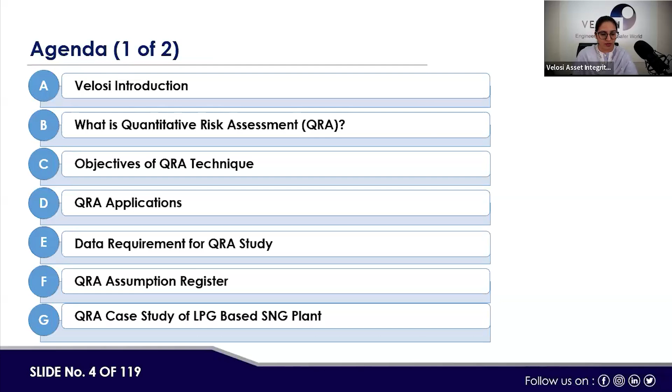Before we begin, let's have a safety moment. Although most of us are in the comfort zone of our homes, we should be aware of emergency exits, keep a safe distance, and generally take care of ourselves and those who are around us.

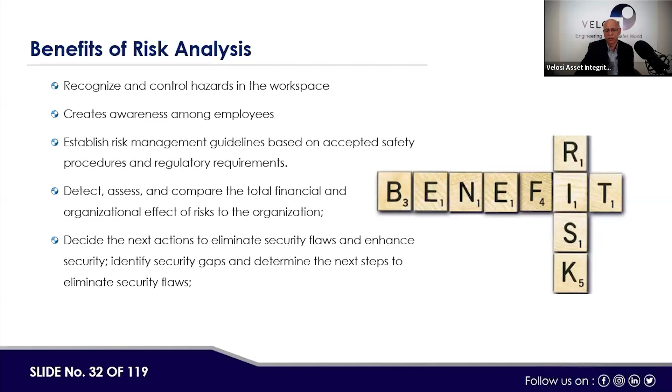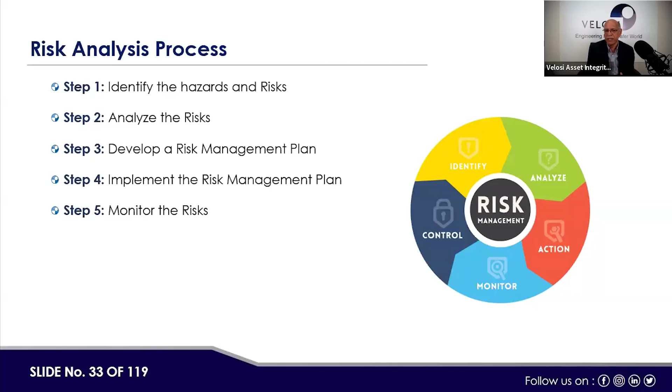So as we have a fair idea about the risk analysis process, what are the general steps when we make a risk analysis process? First of all, we need to identify the hazard, then do the risk assessment, analyze the risks, develop a risk management plan, implement the risk management plan, then monitor the risk management plan that has been applied, like all the mitigative or preventive measures we have identified, whether those are effective and minimizing hazards in the workplace.

As a normal definition, how do we do risk assessment? First of all, system definition or system boundary, what kind or where we want to do the risk assessment. For example, if we are crossing the road, there is also some sort of risk assessment. If we are making any investment in a bank, insurance company, or our own business, we assess what is the risk we will be able to make money.

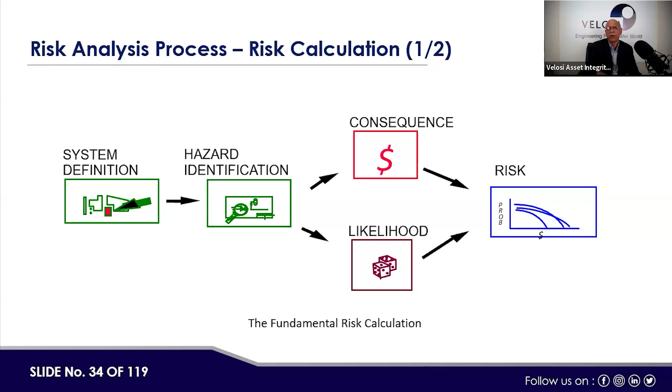On the process side, if we are making a hydrocarbon facility, what is the probability ignition can take place and burn the entire facility? So there is also this risk concept. First of all, we define where we are doing the risk assessment, then hazard identification is done, then consequences in terms of dollars, asset loss, or fatality are calculated. Then likelihood is assessed, and risk is basically estimated as a multiple of likelihood and consequences.

Let's take one example of how we apply the risk assessment concept in our day-to-day life. For example, an insurance company trying to insure 1,000 cars over 1 year, charging only 1,500 USD per car as an annual premium, whereas let's assume the total cost of each car is 15,000 USD.

So they're taking only 10% of the cost as a premium. This means if one car faces an accident, the insurance company will end up paying the full 15,000. Let's see how much money the insurance company is able to collect if they're insuring 1,000 cars. So 1,000 into 1,500 is about 1.5 million.

Let's say 50 cars out of 1,000 are meeting accidents and are fully damaged. So the probability of a car being hit by accident is 50 divided by 1,000, which is 0.05 per year occurrence. The price of each car is USD 15,000. The total risk for the company is 50 by 15,000, which is 750,000. The margin between the money being collected and the potential payout to the customer is 750,000 versus 1.5 million. So almost 100% margin they got.

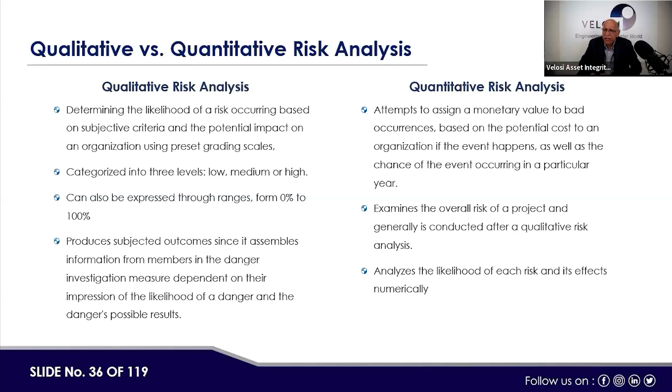So in normal terms, qualitative is more opinionated, quantitative is mostly calculation based. There's also a third term called semi-quantitative, where some is opinionated and some is based on calculations. From a results point of view, quantitative could be considered more accurate, and qualitative more opinion based, with more estimation margin. So semi-quantitative is in between accurate and semi-accurate.

Now, when we talk about qualitative risk assessment techniques, there are various qualitative risk assessment techniques. Even in RBI, risk-based inspection program, we talk about three kinds: qualitative RBI, semi-quantitative RBI, and quantitative RBI. This is also driven by the risk assessment definition—qualitative risk assessment, semi-quantitative risk assessment, and quantitative risk assessment.

There are various techniques used to carry out qualitative risk assessment in a process. These include hazard assessment, or HAZID assessment, or ENVID assessment. There are three workshops done for assessment of risk hazards: the one related to safety is termed HAZID, the one related to environment is called ENVID, and the one related to health is called OHID. So three workshops are done: occupational health related hazards, environmental related hazards, and safety related hazards. Once the hazard analysis is done, we know which are minor hazards, major hazards, or major accidental hazards, MAH.

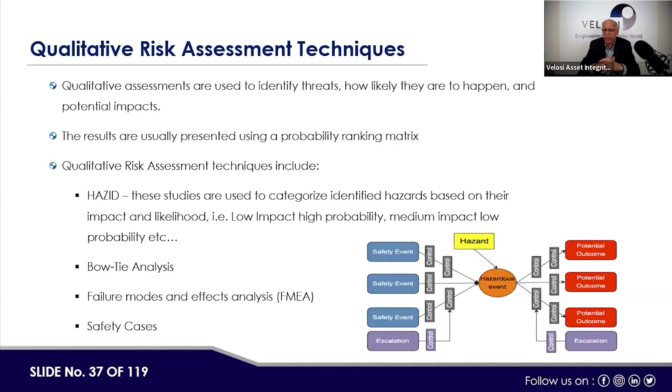Those can be identified. Then quantitative risk assessment is more like, as I said earlier, quantitative calculation based, right? Where probabilities calculations are involved, consequence side calculations are involved, and multiple mitigation layers are also involved in the calculations. And in this way, we try to demonstrate the risk aspects or the consequence aspects on the system.

For example, if we take quantitative risk assessment, normally we use two softwares. I'm not favoring DNV, but since we are mostly using DNV, that's why I'm referring to them. One is PHAST, and the second one is SAFETI. PHAST is basically for the dispersion modeling, which is mostly consequences, and SAFETI is basically risk, consequence and probability, and then risk is calculated. So by combination of these two tools, where SAFETI is a combination of PHAST and the risk side, we are able to see the contours of the consequences and contours of the risk as well.

So in general terms, the data which is populated is based on certain calculations, certain input data, and accordingly, we are able to estimate risk up to a particular accuracy level. We cannot say the QRA risk assessment is very accurate. No, it's still a judgment, with many ifs, and there are many assumptions. For example, who can say whether hole size would be 1/4 inch, 1 inch, or there would be a rupture? Which part of the pipe would have a leakage?

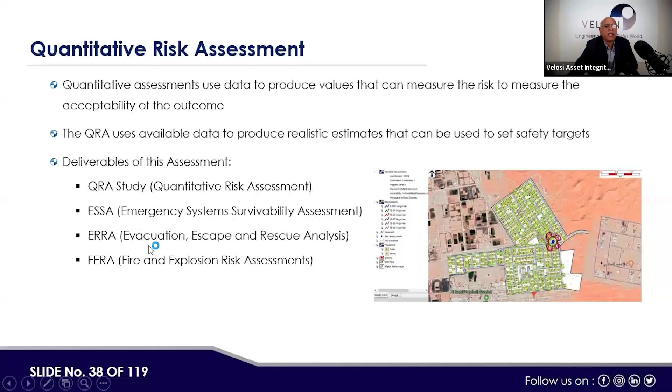So two studies are very much relevant to quantitative risk assessment. One is QRA, and another one is FERA, the first one and the last one in my presentation. Here, QRA is quantitative risk assessment, and FERA is fire and explosion risk assessment. Both are more or less the same. FERA is more focused on the assets, whereas QRA is more focused on the people. Then there is ESSA, emergency system survivability assessment, and ERRA, evacuation, escape, and rescue analysis.

So if we ask ourselves, what can you deduce from the different deliverables of qualitative and quantitative assessment, what we can produce, what we can achieve? Both types of risk assessments are necessary for risk studies and they do not go against each other. Qualitative, semi-quantitative, and quantitative, all three approaches complement each other. One is more on the quality, the judgmental side. The other is judgmental plus calculations, and quantitative is more calculation based.

Qualitative assessment forms the foundation of quantitative studies that need to be performed. Both types of risk assessment are equally important. For example, bow tie analysis is a qualitative study. It provides input for many QRA studies.

Now, if we go a little bit more into the quantitative risk assessment side, what is QRA? Now you will see some repetition; we are debating the same points again and again. But this webinar is focused on newcomers. I know there could be some people who already know the QRA process, and for them it could be a little boring or repetitive. However, for newcomers, I have to go through the basics, so people can understand and use it further.

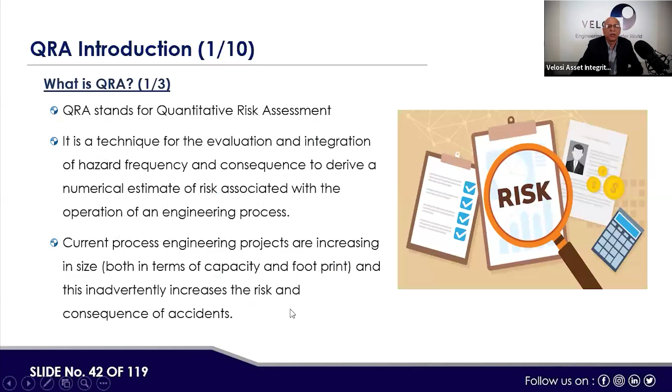It could also be applied to non-engineering, but we are saying engineering process. Current process engineering projects are increasing in size, both in terms of capacity and footprint, and this inadvertently increases the risk and consequences of accidents.

Now, the types of hazards: there could be process hazards, environmental hazards, and occupational hazards. With occupational safety hazards, normally we call it HSE. H is health, S is safety, and E is environment. Process hazard goes with S, occupational hazard goes with H, and E goes with environmental hazards. So which hazards are considered for QRA? Normally, process hazards.

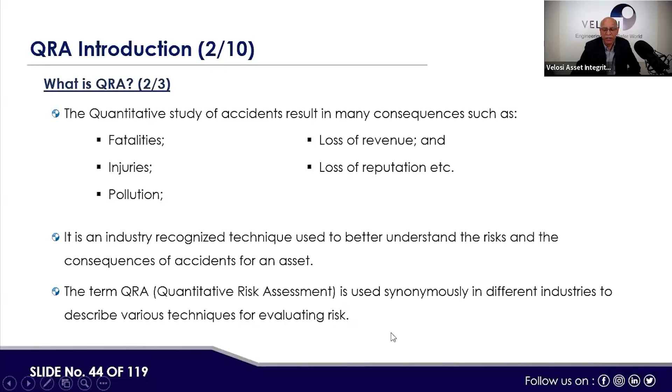Now, the quantitative study of accidents results in many consequences such as fatalities, injuries, pollution, loss of revenue, and loss of reputation. But here, in the QRA, it would mainly be focusing on the PLL or the safety hazards generally. It is an industry recognized technique used to better understand the risk and the consequences of accidents for an asset. The term QRA, quantitative risk assessment, is used synonymously in different industries to describe various techniques for evaluating risk.

Now, what is QRA? Again, the technique discussion is ongoing. High risk or major accidental hazards have been identified for operation. QRA shall be required to demonstrate tolerability and ALARP in support of a project or a facility. There is potentially high risk exposure to workers or the public at the project site.

What we are trying to achieve in the QRA is: what are the hazards, what is the quantity of those hazards, quantification wise, how big, how small, how much effect this hazard would have on the people, on the asset, in terms of toxicity impacts, or in terms of fire and explosion impacts. And then accordingly, what kind of preventive measures are there, what kind of mitigating measures we can add and utilize in minimizing those hazards for the owner and for the operator in the area.

Application. Identify process hazards associated with the facility. As we've been discussing, it is a valuable tool for determining the risk of the use, handling, transport, and storage of dangerous substances. To quantify the risk associated with the facility, for example, risk contours, individual risk per annum (IRPA), potential loss of life (PLL) and FN plots for the various kinds of risk. Identify appropriate risk reduction options. Demonstrate the risks are being managed to a level as low as reasonably practicable.

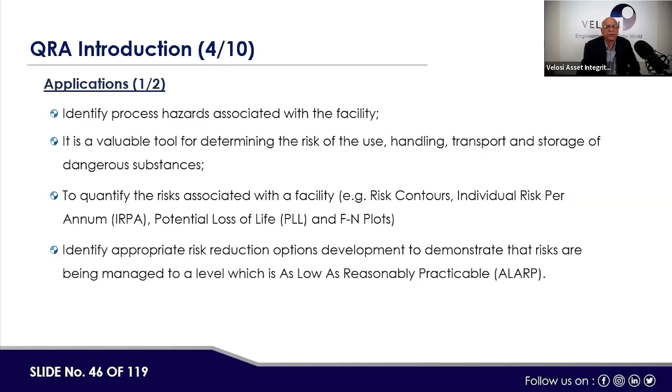Next, if there is a certain risk associated, how can that risk be minimized? To minimize the risk, we may have to increase the costs. We may have to add more mitigative measures. We may have to make a safer or inherently safe design of the process equipment. So it would also have a certain cost. So there is a cost benefit analysis of how much risk we take and how much cost we spend. Based on the cost benefit analysis, the system or operation is kept inside the ALARP region.

Some other QRA applications, such as fatality risk assessment, comprehensive QRA, risk to life, safety function, evacuation, escape and rescue analysis, emergency system survivability assessment (ESSA), and fire and explosion risk assessment, are also part of the QRA or risk assessment exercise.

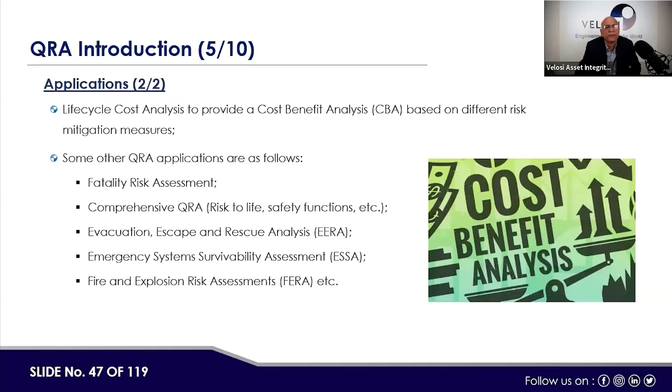Benefits we also covered earlier, but again, to help you carry forward, the benefits of QRA: help to reduce risk by supporting risk-based decision-making, comparing options during the design phase or for modification during operations, supporting the demonstration that risk levels are reduced as low as reasonably practicable, defining requirements for land use planning, and defining requirements for emergency response planning.

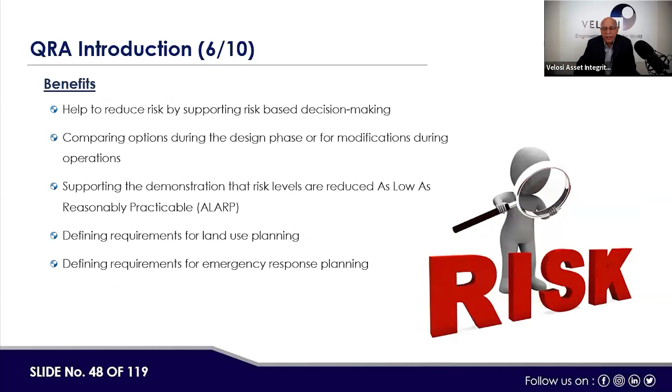Then there are also limitations. The QRA process implies a level of accuracy that does not exist. It's not so accurate. There are things like how we estimate the volume of the fluid, how we estimate the parts of that particular inventory, how we make the inventory isolatable sections, and similarly the number of holes, the location of the hole, direction, wind effects, and so on. So there are still other factors which create limitations for the QRA process. It can divert attention from precautionary or preventive measures.

Lack of reliable data in specific areas may also cause trouble and may misdirect us. It is often dominated by hardware issues and rigid handling of the human factors. Theoretical modeling may not reflect actual operations.

So these are the limitations of QRA, but something is better than nothing, and it can give at least a brainstorming process where we are thinking about the hazards, how big the hazard is, the number of mitigative measures, or trying to demonstrate all the barriers in a bow tie. So this process is always helpful, but with all those positives, there are certain limitations which should be kept in mind as well.

Then general QRA objectives, what we will be covering. As you can see, a lot of theory, like why QRA is required. So we're just going through to understand the strengths, weaknesses, and what we want to achieve out of QRA. That's the first objective. But then we'll also pass through the process of QRA, the estimation or quantification of the risk associated with the hazardous process.

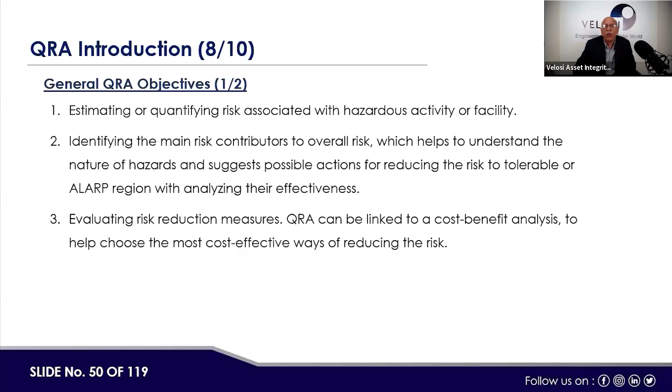It can be helpful, right? We can estimate the volume of the risk or hazard associated with the facility, identifying the main contributors to overall risk, which helps to understand the nature of the hazard and suggest possible actions for reducing the risk to a tolerable or ALARP region, analyzing their effectiveness. Then evaluating risk reduction measures: QRA can be linked to a cost-benefit analysis to help choose the most cost-effective ways of reducing the risk. Then demonstrating compliance with regulatory risk tolerability criteria or showing whether the risks have been made as low as reasonably practicable.

Identifying safety critical procedures and equipment, which are critical for minimizing risk and need close attention during operation. Highlighting to the workforce accident precursors which may be monitored during operation. Increasing awareness of hazards, scenario-based escalation and mitigations.

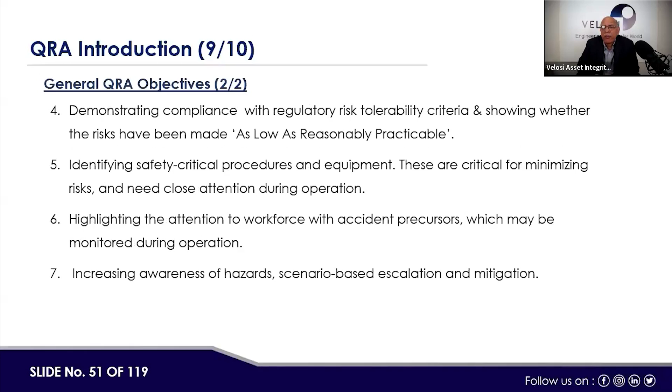Now, why is QRA important? One incident we are showing you was in 2009, the Cataño oil refinery, in Puerto Rico. It was caused by a malfunctioning tank fuel gauge. Workers failed to notice one of the tanks was overflowing before the fuel vapor ignited upon contact with electrical equipment. Consequences: no deaths, 3 non-fatal injuries, several buildings and oil tanks damaged, and 30 million gallons of petroleum released into bodies of water and neighboring wetlands.

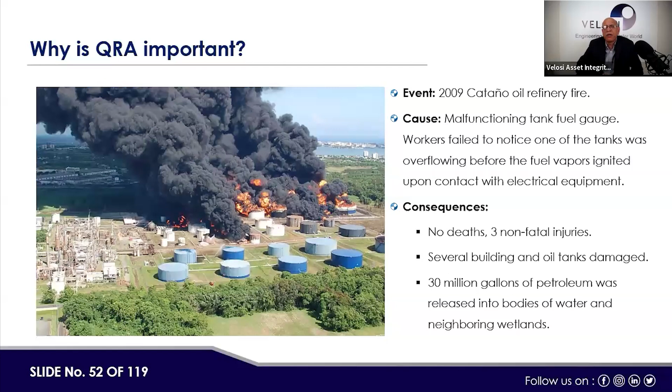So this is the picture you can see. These are real scenarios where fire can occur, destroy entire facilities, and also kill people. To avoid these kinds of scenarios, it's better to do real hazard analysis and have the required mitigative measures in place.

Standard references: the first reference is the Risk Assessment Data Directory Overview, which is OGP 434. This is one of the documents which can be used for reference. The second one is SAFETI 7.2 training. Now there is a later update; my presentation is an old one. Previously it was DNV GL, now just DNV; GL has been removed. You might be using some other software, so you may need the user guide for that software as well.

Similarly, there's the TNO book, normally called the PGS2 yellow book, methods for calculating physical effects. What this TNO book calculates, if I can show you: general introduction, outflow and spray release, pool evaporation, vapor cloud dispersion, vapor cloud explosion, heat flux from fire, rupture of vessels, and so on.

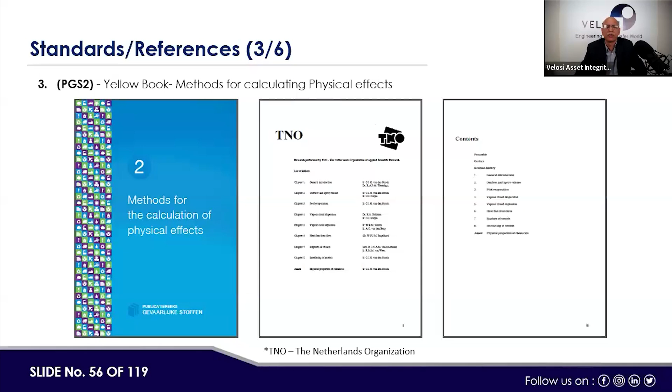So these guidelines are basically applicable for our QRA process. So we should have the relevant references so we can read what are the major calculation modes and theoretical models applicable on the QRA process. Similarly, if we go next, one is a PGS3.

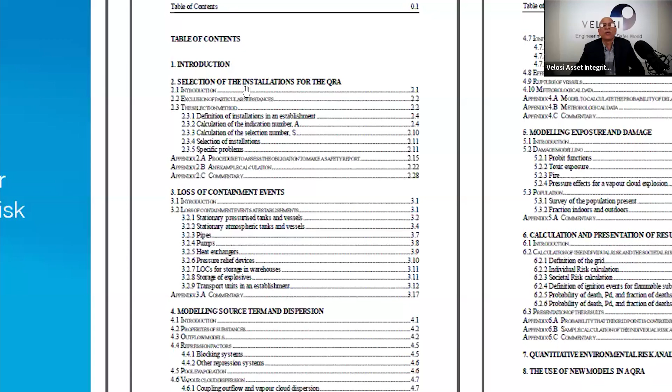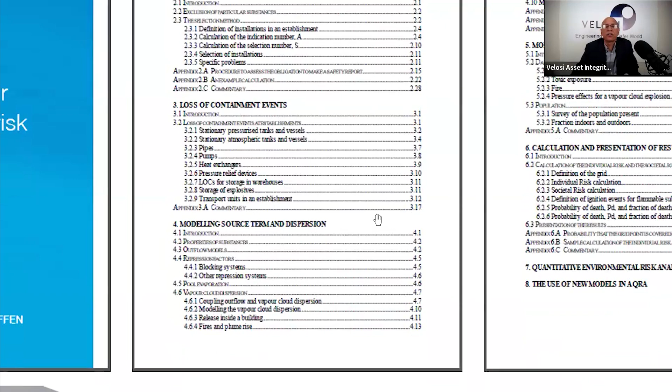So next, if we say yellow book, purple book, and TNO book. So there are references, international references, which are available for us to work on the QRA modeling. So here, purple book, guidance for quantitative risk assessment. And if we see certain elements here, selection of the installation for the QRA, then loss of containment, then modeling source term and the dispersions, then modeling exposure and damage, then calculation and presentation of the results, and so on.

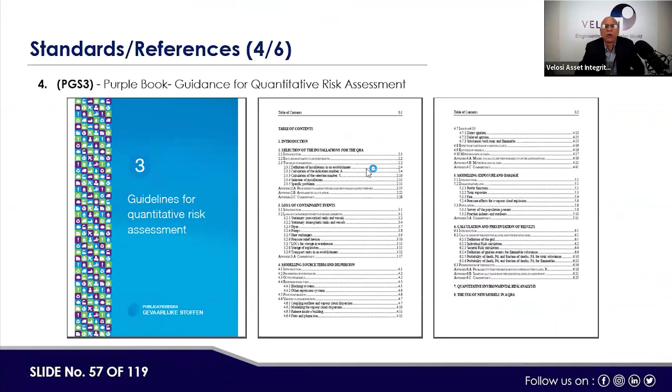The quantitative nomenclature is also there. So in a way, what I'm saying here, there are various references. The references we are showing are the minimum ones, and other references can also be taken from other international sources. Next one, there are also ADNOC references like ADNOC HSE risk management.

There is a standard ST01, and one thing I should acknowledge is that we are working in the entire region, like in UAE, Saudi Arabia, Qatar, Oman, and in the Far East and African region. ADNOC HSE management system is one of the best. We are not saying this from a biased point of view because we are in Abu Dhabi, but from what we have seen.

ADNOC has described the HSE MS system in a very effective way, and it's a regulatory requirement for every project. All the required studies and the demonstration of the risks are required to be managed in a documented way, and for every project at FEED stage, EPC stage, and operation stage, all HSEIA related documentation and protocol is required to be reviewed and approved by ADNOC HQ. So this is one of the standards ADNOC is using for its projects.

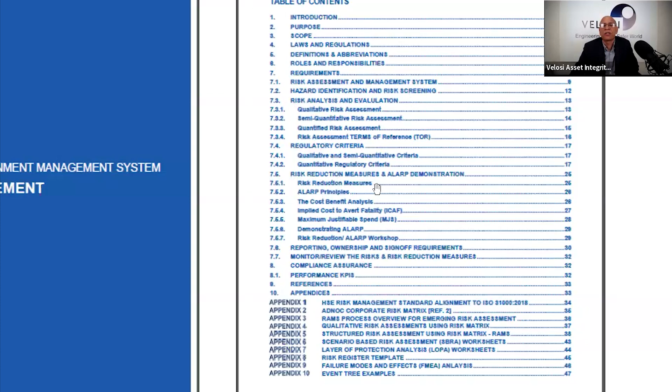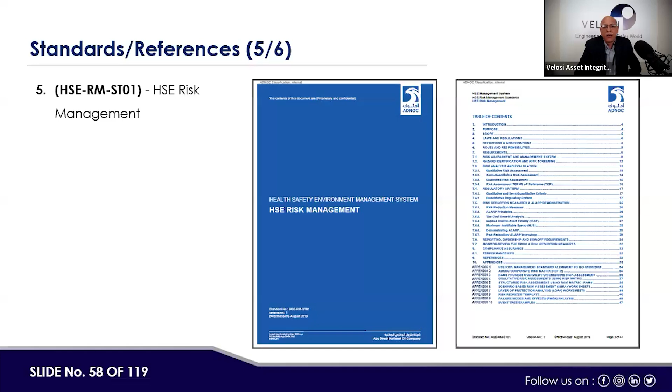For example, if you see, risk assessment and management system, then 7.2 is hazard identification and risk screening tool, then regulatory criteria, 7.5 risk reduction measures and ALARP demonstration, and so on. So ADNOC has published all the relevant standards for the HSEIA protocol. Then there is HSE RM ST10, which is quantitative risk assessment, and this is what we call the QRA standard. It also covers all aspects like hazard identification, for example.

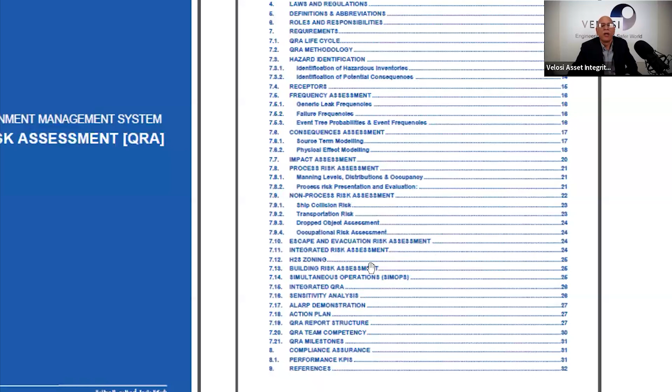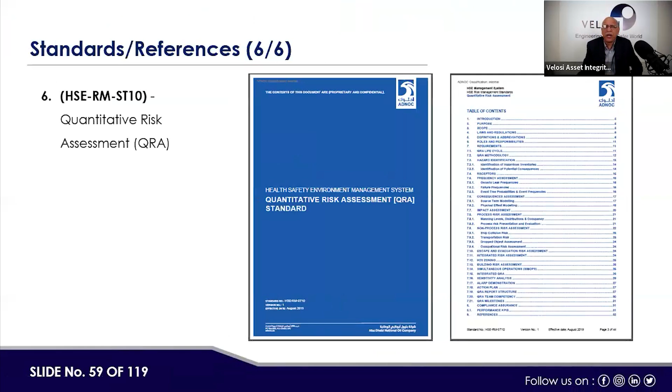Then if you see next, hazard identification, receptors, frequency assessment, consequence assessment, impact assessment, non-process risk assessment, escape, evacuation risk assessment. Everything is okay? Okay, right. Integrated risk assessment, H2S zoning, then building risk assessment, integrated QRA, sensitivity analysis, and so on. So if anyone wishes to learn more about how QRA can be done, ADNOC has established very useful documentation, codes and practices as well.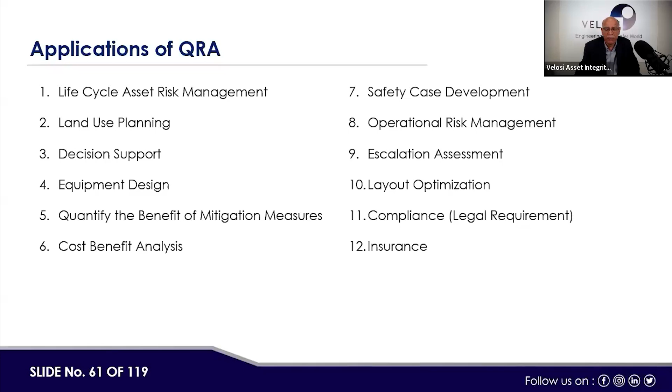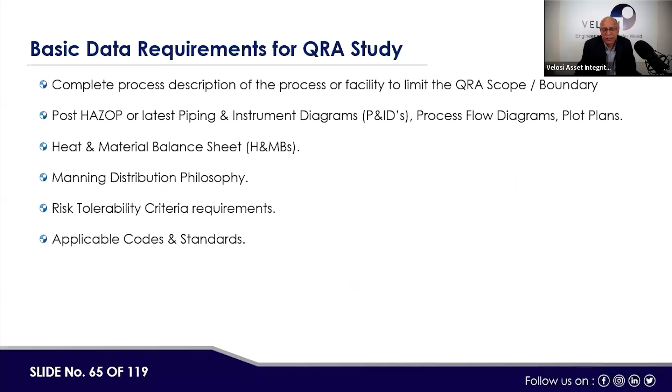So then, basic data we need for a QRA study is a complete process description of the facilities to limit QRA scope and boundary, post-HAZOP or latest piping and instrumentation diagrams, process flow diagrams, plot plans, then heat and material balance sheet, HMB sheet we call it, manning distribution philosophy, risk tolerability criteria requirement, then applicable codes and standards. So before we go to the QRA case study, we'll take the question answers now.

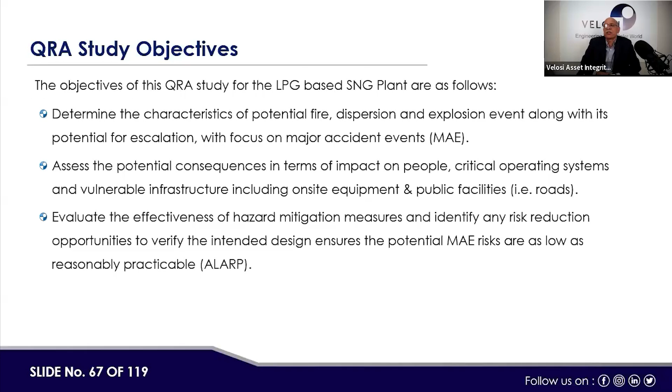So the objectives of this QRA study for the LPG based SNG plant are as follows: determine the characteristics of potential fire, dispersion, and explosion events, along with their potential for escalation, with focus on major accident events. Assess the potential consequences in terms of impact on people, critical operating systems, and vulnerable infrastructure, including on-site equipment and public facilities or roads. Then evaluate the effectiveness of hazard mitigation measures and identify any risk reduction opportunities to verify the intended design, ensuring the potential MAE risks are as low as reasonably practicable, ALARP.

Then process description: the SNG plant, synthetic natural gas plant, is to be installed at a client site designed to supply gas to a total of 306 residential villas. Consumption is about 5,840,861.7 BTU per hour through a dedicated natural gas network, carefully designed as per client standards and regulations.

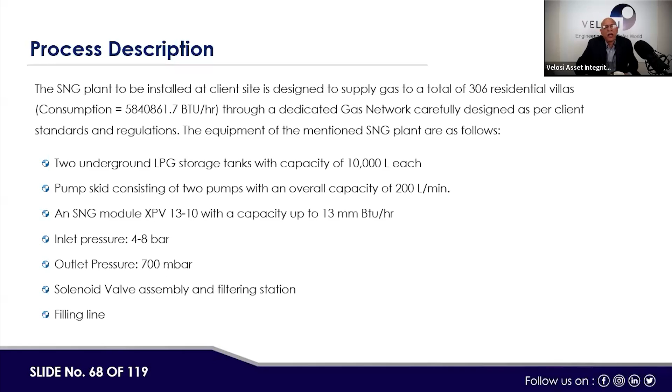The equipment of the mentioned SNG plant are as follows: 2 underground LPG storage tanks with a capacity of 10,000 liters each, a pump skid consisting of 2 pumps with an overall capacity of 200 liters per minute, an SNG module XPV 13-10 with capacity up to 13 MMBTU per hour, inlet pressure 4 to 8 bars, outlet pressure 700 millibars, solenoid valve assembly and filtration station, and filling line.

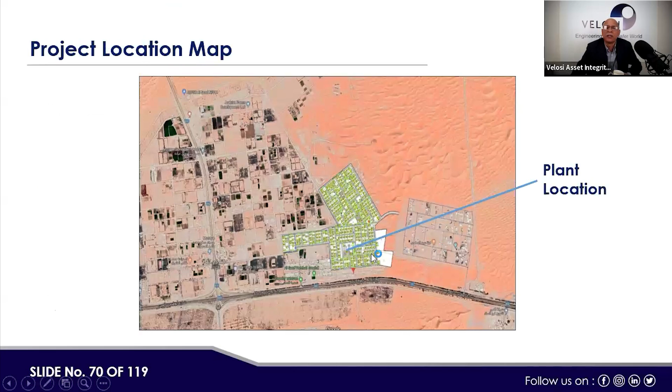QRA methodology, what we used: hazard identification, then scenario identification, then frequency analysis, consequence modeling, risk determination, then evaluation of the risk, then identify and prioritize potential risk reduction measures.

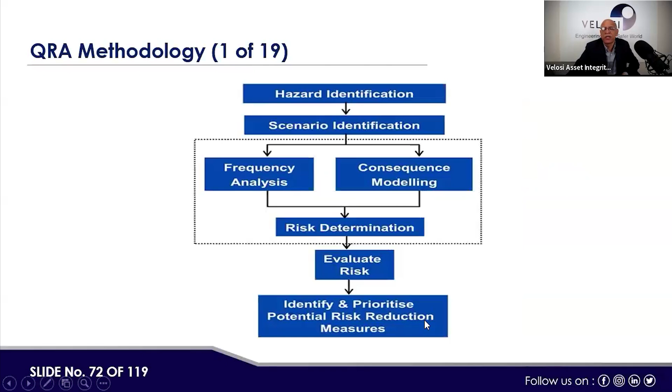Here we did a HAZID workshop, and under that HAZID workshop, 09 high risk hazards, 21 medium risk hazards, and 03 low risk hazards were identified.

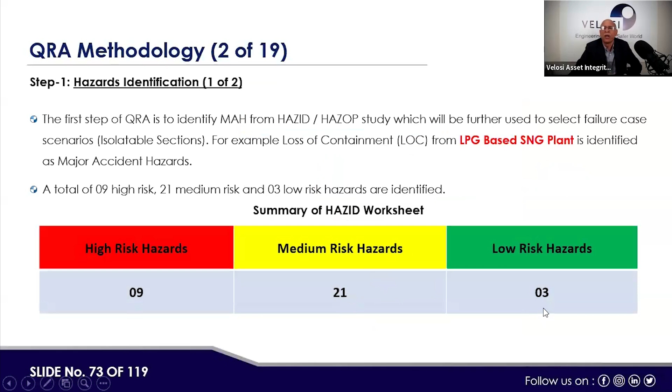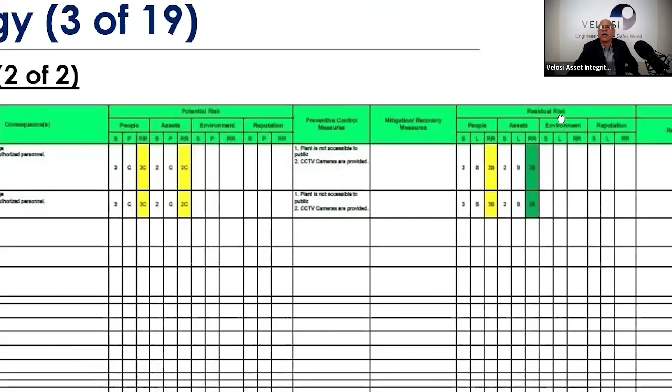So this was the sample worksheet we used for the hazard identification, node by node. Here I'll show you what we tried to cover under this - for example, guide words, threat, top event, consequences, potential risk with the current safeguards, and then recommendations. If we have to add, then it would be the new residual risk after the recommendations.

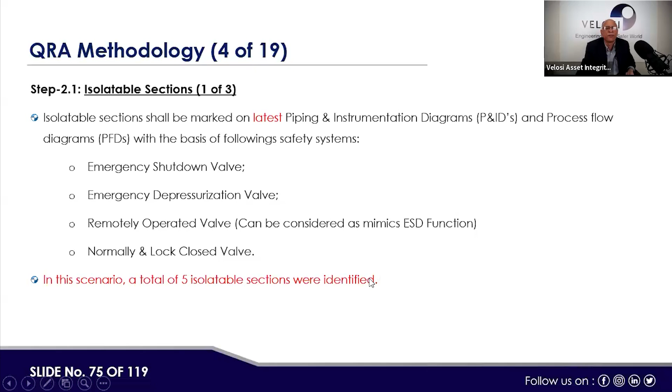Next, we identified isolatable sections. The isolatable sections are marked on the latest P&IDs, and these isolatable sections are marked with the help of identification of emergency shutdown valves, emergency depressurization valves, remotely operated valves, and normally lock-closed valves. Here, a total of 5 isolatable sections were identified in the current project. It was a small project we are just showing you - there are many complicated projects, but this is the simplest one. Here are the 5 isolatable sections.

Number 1, A100 filling point where the tanker comes and pours the LPG. Then storage tank filling line. Then equalizing valve, return line. Then B200A gas storage tank. Then B200B gas storage tank. Then C300 pumping, and then D400.

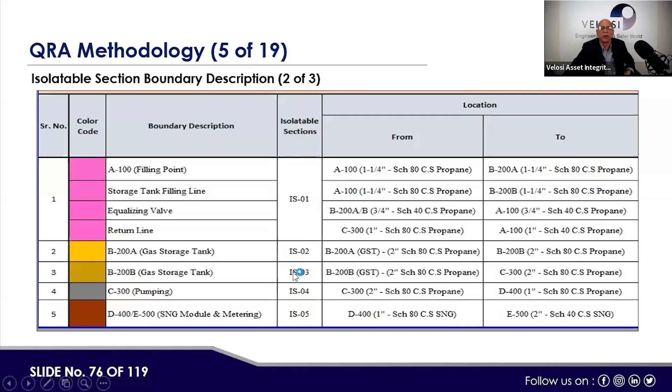Then there were basically parts count methodology and leak size distribution, 1 of 2 and 2, two slides are there. So here, if you see, boundary description, isolatable section, flanges 2 to 6 inch, and manual valve 2 to 6 inch, then instrument connections, pressure vessel with connection 50 to 150 mm dia, then with connection greater than 150 mm dia, centrifugal pump with connection, then piping length. In this way, all the isolatable sections and their parts are identified.

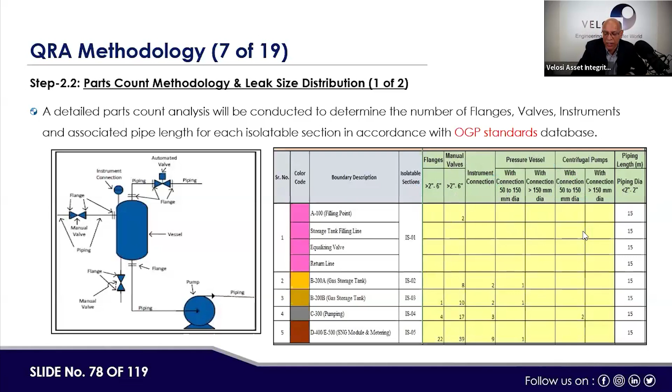Then the following leak sizes shall be considered for further modeling and assessment as per the OGP and TNO standard: 1 to 10 mm hole size for small leakages, 10 to 50 mm hole size for medium leaks, 50 to 150 mm hole size for large leaks, 150 mm hole size for very large leaks, and piping size leak for full bore rupture.

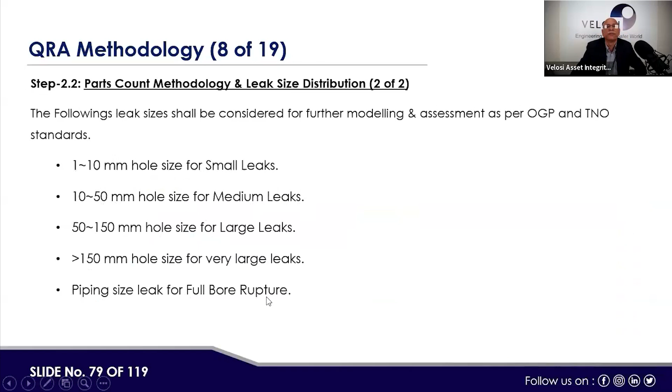Here, the input sheet and source term modeling inventory calculations are shown for all those 5 isolatable sections. Then composition is 70% propane, 30% butane, with operating temperature, operating pressure, density, length, then flow rate in terms of dynamic flow rate, given in kg per second.

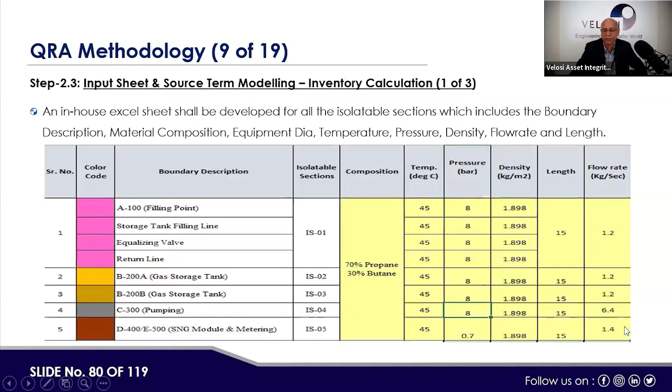Then static mass inventory shall be calculated for each isolatable section as equipment volume multiplied by the density of the service material. For the dynamic inventory calculation, below time factors shall be multiplied with the discharge rate for each isolatable section leak size. For example, automated ESD valve 2 minutes, remotely operated valve 10 minutes.

The total mass inventory equals static inventory plus discharge rate multiplied by detection and isolation time of the valve. Then the static and dynamic inventory shall be calculated to identify and assess the physical effects from all the isolatable sections with different leak sizes.

As per TNO Purple Book, the following leak sizes shall be used for dynamic inventory calculations: small 5 mm, medium 25 mm, and large 100 mm. In this way, sectionalizing the same sections, total static volume includes 20% additional volume as well as density, and total static inventory in kg. Then we get the release rate, dynamic inventory in kg based on the hole sizes, and total release inventory as a sum of both dynamic and static.

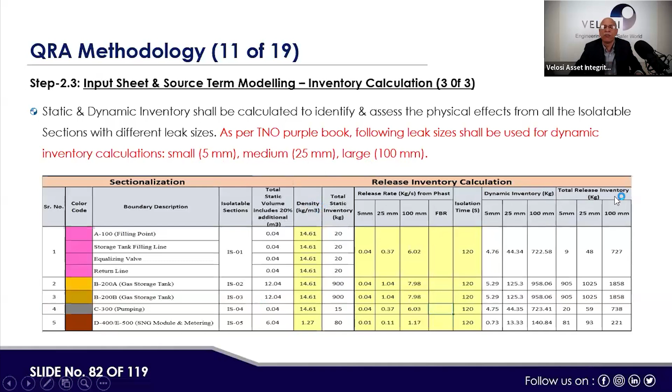Then once inventory is calculated, we go to calculation of failure frequency analysis. The frequencies of loss of containment from each leak source shall be taken from validated industry databases and combined with the parts count to generate failure frequency of leaks from each section.

Parts count methodology shall be adopted in compliance with equipment failure frequency databases as prescribed in IOGP 434-01 or 04 standards. The failure frequency of each isolatable section shall be calculated as below. For example, total failure frequency of one isolatable section is the count type of equipment multiplied by the probability of failure, plus count type of equipment and other multiplied by the probability of failure, in this way, continuing for all the parts.

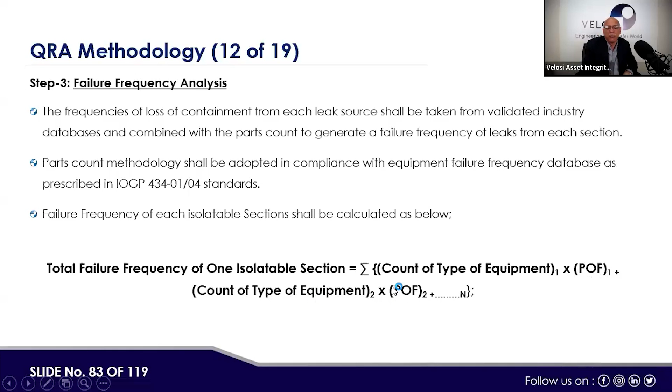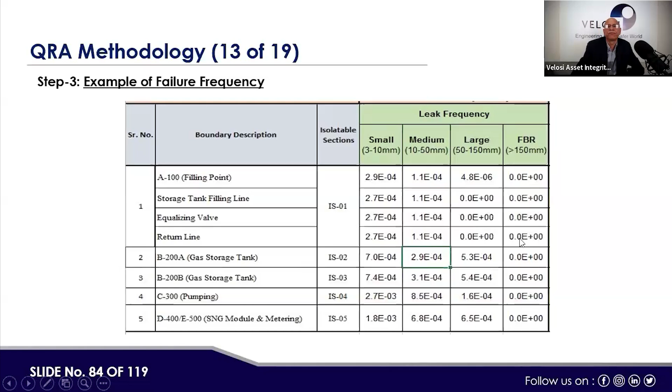Then from the QRA modeling, the following results will be extracted from PHAST software: jet fire, flash fire, vapor cloud explosion, multi-energy, and then vulnerability assessment for human, plants, and structure shall be defined from OGP 434-14/15 standards.

From QRA modeling, the following results will be extracted in SAFETI software: location-specific individual risk, LSIR, land use planning criteria, then individual risk per annum, IRPA, risk tolerability criteria, then societal risk FN curve outside the boundary of project societal criteria.

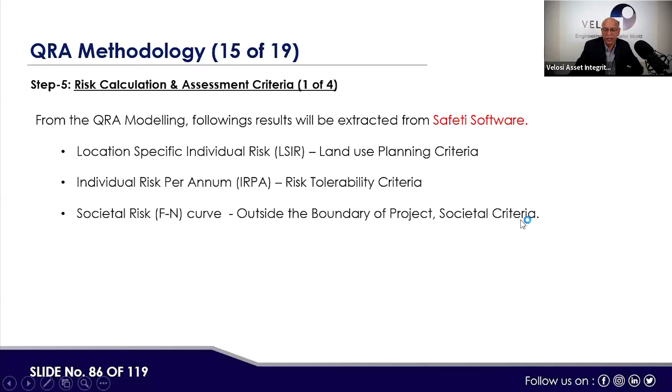Now here, this is the tolerable limit demonstration. For example, any activity coming in the red zone where maximum tolerable limit is 1 in 10,000 per year. Then there is another number, 1 in 1 million per year, right?

Here, anything within 1 in 50,000 per year or 1 in 5,000 per year is called ALARP, and facilities can be operated on this basis. But if anything comes to 1 in 1,000 per year, that is not acceptable.

This is acceptable, as low as reasonably practicable. So high risk ranking must be reduced up to the ALARP level. Then by adding more mitigative measures, for medium risk ranking, ALARP demonstration is required and a sensitivity case can be introduced.

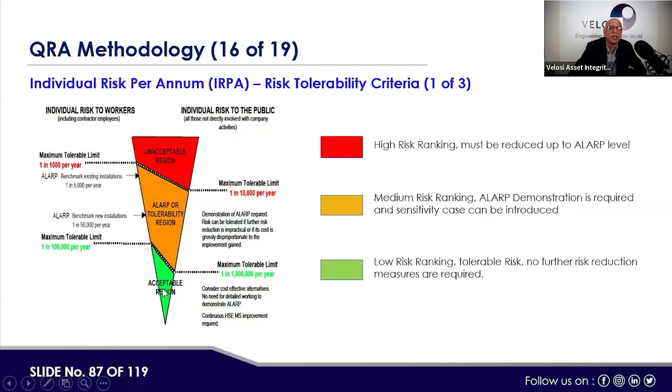Then for low risk ranking, tolerable risk, no further risk reduction measures are required. So normally, ideally, if we can get low risk by virtue of the inherent safe design, that can be considered as an acceptable region as well.

Now this FN curve, for example, shows acceptable risk, ALARP, and unacceptable regions. These are the number of fatalities, and this is the frequency. We can accept that if any frequency is below 10 to the power minus 7 or minus 8, and between minus 4 to minus 6, that is called ALARP. If anything above minus 4 to minus 3 or minus 2, that is unacceptable.

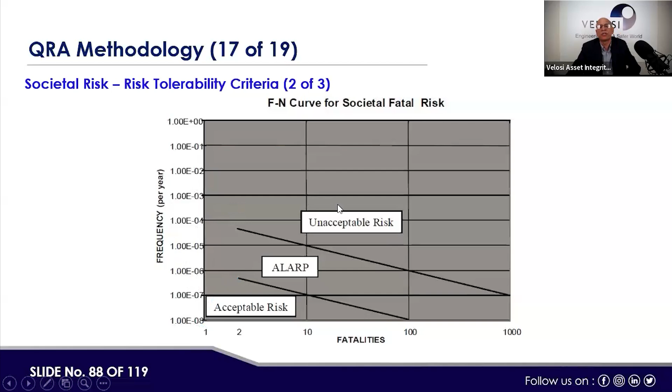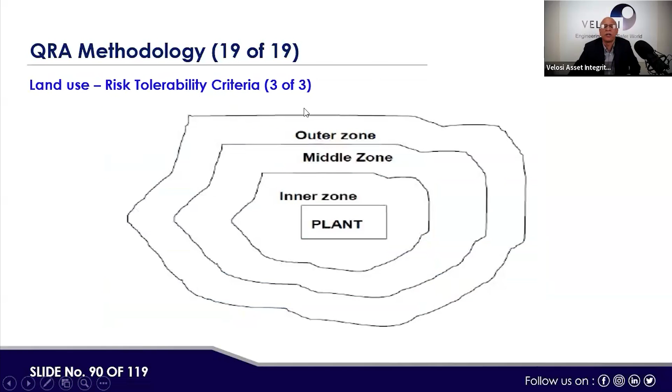Here, when we make the risk tolerability criteria, we define the outer zone, middle zone, and inner zone of the plant. This is the plant, and this is the residential area around the plant.

Here in the assumption register: hazards identification done, isolatable section markup methodology prepared, process parameters established, provided by heat and material balance as well, inventory assessment calculation method, release direction and height of the storage vessel, human vulnerability, plant and structural vulnerability, then ignition probability with UKOOA correlation model, risk ranking points, manning distribution philosophy, detection and isolation philosophy, then regulatory risk tolerability criteria. So these are the 12 assumption register items covered.

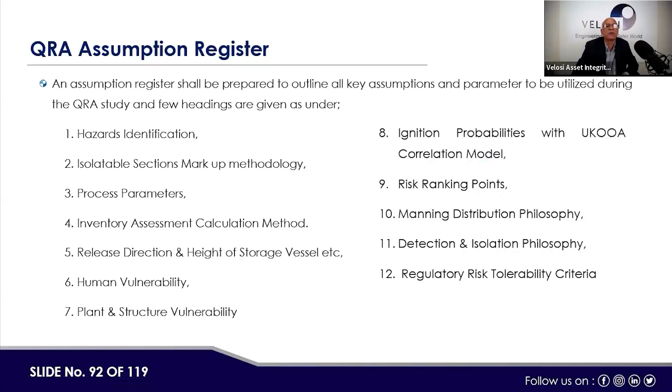Then QRA modeling input: uploading of raster image of the project-specific layout of the facility and surrounding area, define process material as per material composition of heat and material balance sheet for all the isolatable sections, placement marking of isolatable section in accordance with plant layout locations, and activation of the PHAST/Safeti specific model as per type of equipment or type of building.

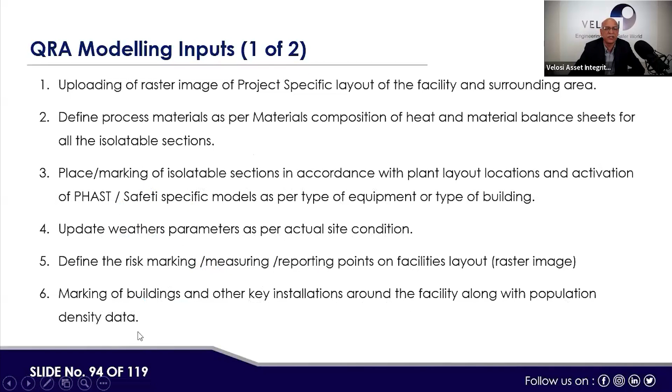Update weather parameter as per actual site condition. Define the risk marking and measuring reporting point on facility layout raster image. Marking of buildings and other key installations around the facility along with population density area data. Define risk effects levels in accordance with applicable risk impact criteria.

Marking of potential explosion site, PES, on facility layout drawing raster image as per TNO games method or TNO color book methodology for congestion modeling - not applied for this facility because congestion was not applicable. Insertion of project-specific ignition sources on the layout drawing raster image, and other model optimization actions as needed. So these are 11 actions when you try to make the model in the PHAST and Safeti software.

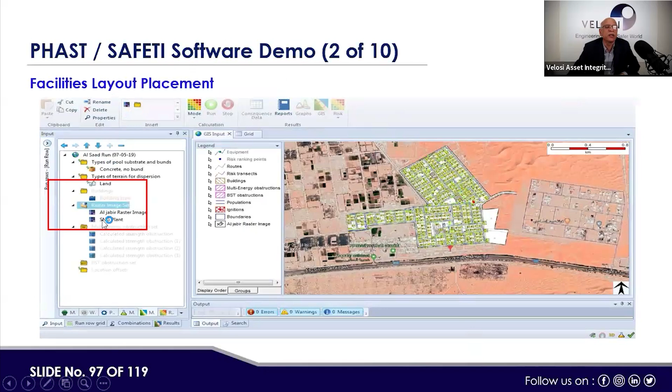Here, when we bring in the raster image, we can see this is the plant, where the plant was located - the Al Jabir raster image, the SNG plant. Then LPG gas and their composition is shown: propane 70%, butane 30%, or 0.7 or 0.3.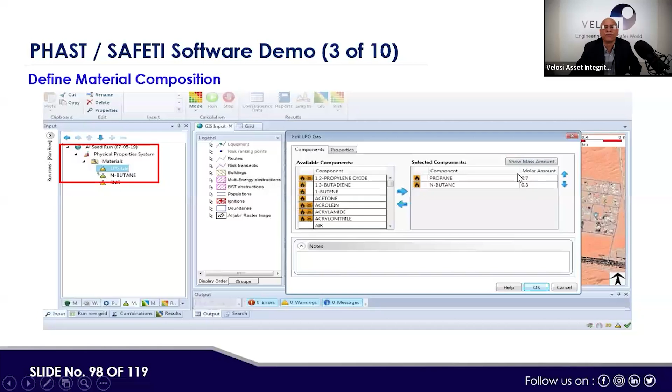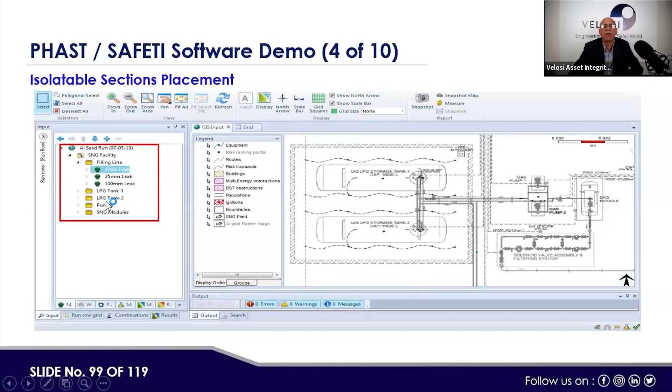Then this is one of the isolatable section placements, showing how those are marked on the particular area: filling line, 5 mm leak, 25 mm leak, 100 mm leak, and other things like LPG tank, LPG 2 pumps, and so on - there are 5 isolatable sections marked on the plant.

Here is the physical properties input for LPG, like parameters such as temperature, pressure, vapors. Then the ingestion of ignition sources, like loading truck, light pole 1, light pole 2, or any other ignition source which can ignite, those are identified.

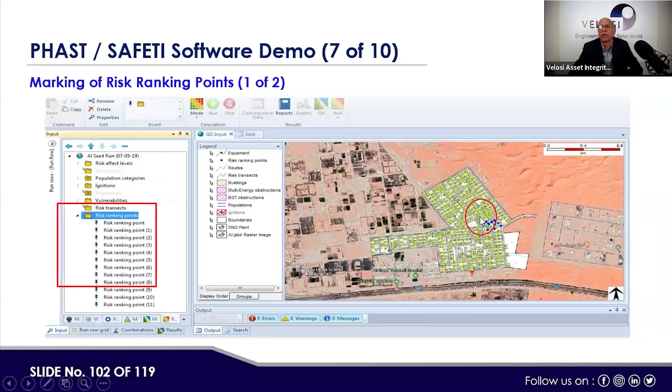Here, the marking of risk ranking points - risk ranking points 1, 2, 3, 4, 8, or 11 - are marked all over the facility. If you look at the layout, these are basically the receptor points, the blue points which are marked, and here is the plant location.

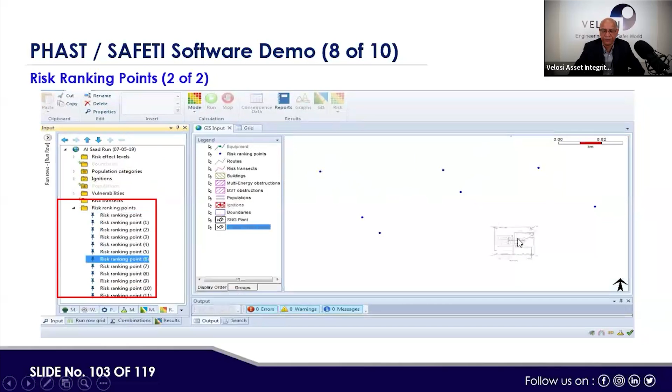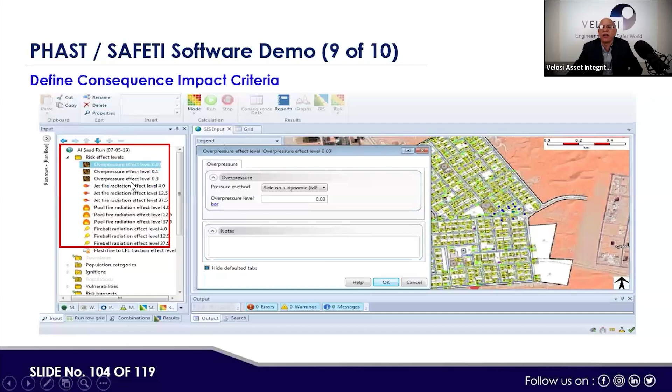Then define consequence impact criteria. So here, overpressure effects, then jet fire radiation, pool fire radiation, and fireball radiation. So these are basically the consequence impact criteria defined. Then the final modeling template, like here, all the isolatable sections where the complete data is populated.

So QRA modeling output: we have done the complete modeling step by step. But if we use the SAFETI operating manual and some guidance available, some senior who has used this modeling software earlier, he can guide you and you can use it.

So in the QRA modeling output, the worst case jet fire scenario is found to be due to leakage of 100 mm from isolatable section IS03, causing jet fire with flame length 37.53 meter and its heat radiation of 4 kilowatt per meter square reaching up to a distance of 68.96 meter. The worst case flash fire scenario is found to be due to leakage of 100 mm from isolatable section IS03, causing flash fire with LFL 42.10 meters.

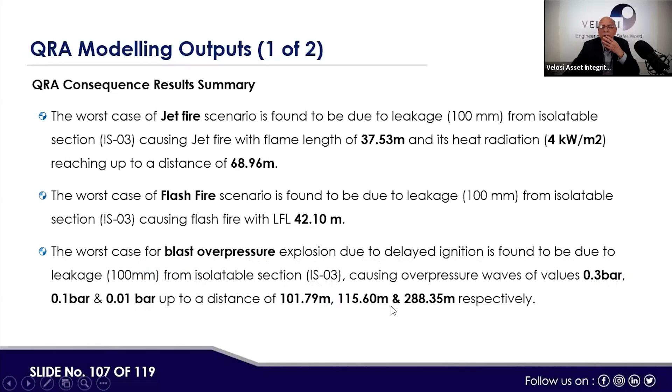The worst case of blast overpressure explosion due to delayed ignition is found to be due to leakage of 100 mm from isolatable section, again IS03, causing overpressure waves of value 0.3 bar, 0.1 bar, and 0.01 bar up to distances of 101 meters, 115 meters, and 288 meters respectively. The location-specific individual risk, LSIR, value of the significant scenarios of the SNG plant is 8.83 × 10^-4. The SNG plant is an unmanned facility.

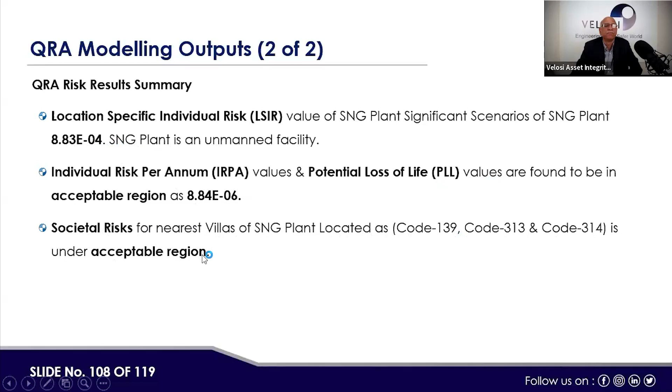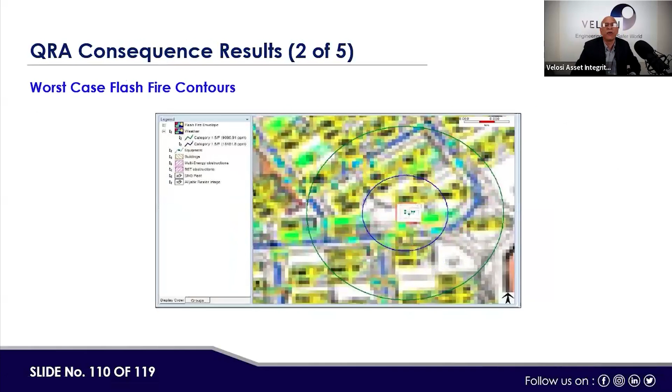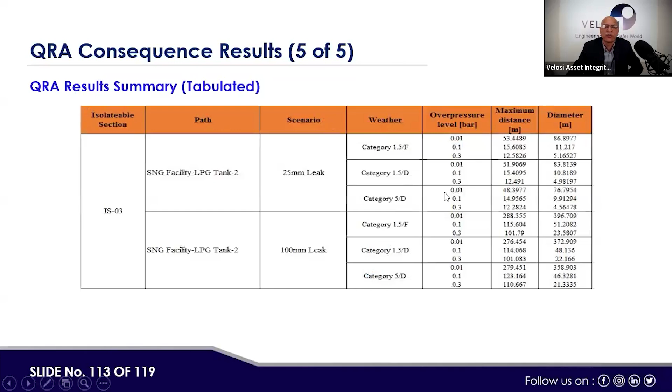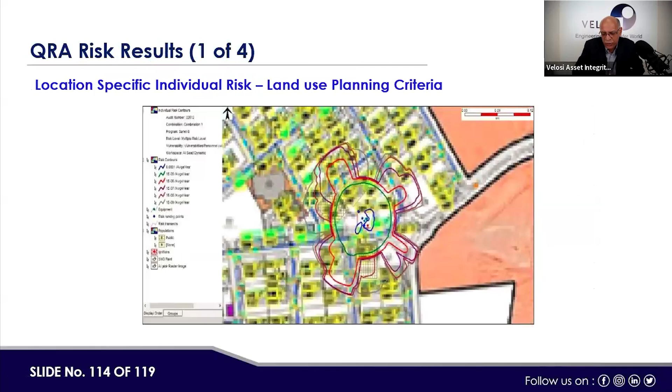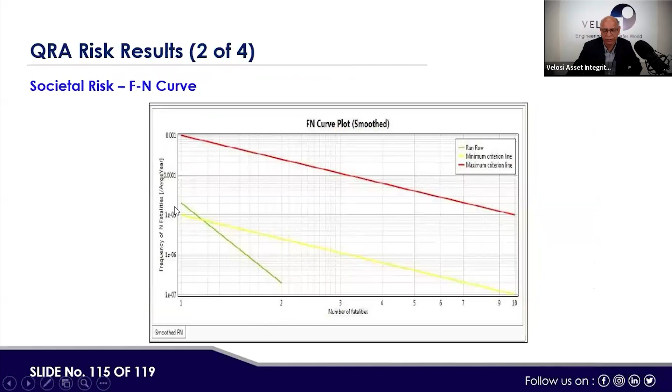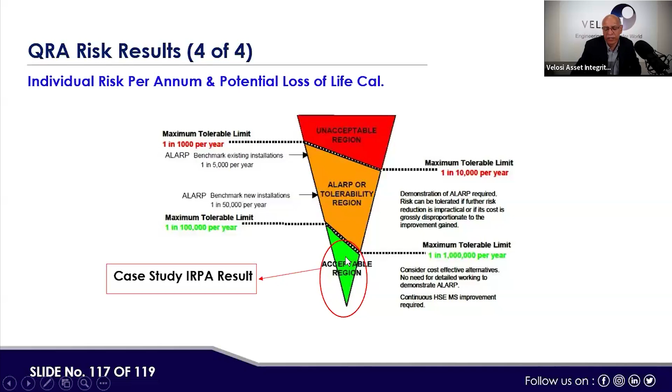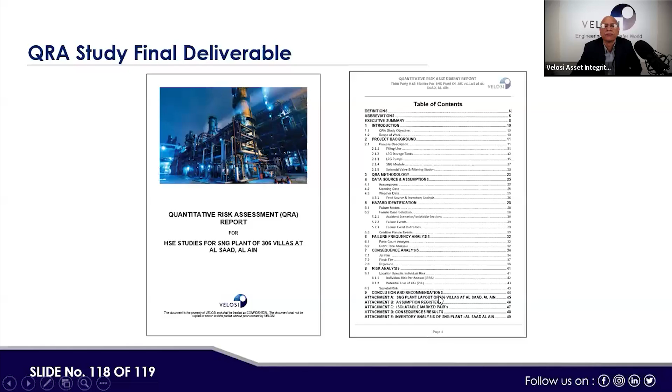So here, most of the plant is shown with IRPA results in the acceptable range, except one minor portion. Then the final report we delivered, the QRA report, includes QRA methodology, data source and assumptions, hazards identification, failure frequency analysis, consequences analysis, risk analysis, conclusions and recommendations, SNG plant layout, assumption register, isolatable-marked P&IDs, consequence results, inventory analysis results, and so on. So this concludes our presentation.

Now we go back to the question answer as the last part of our session. And I hope the presentation may not make you an expert in QRA, but it can give you an idea how QRA is done. As per my own experience, if one person has done QRA in the past, he can train newcomers very fast. There are specific steps, and you follow them by taking help from the QRA and TNO blue books data, ADNOC standards, and the SAFETI software module.

So you will be able to do modeling, and it's quite extensive work when it goes to refinery plants or gas plants where hundreds of P&IDs are involved. So it's quite exhaustive work. However, if we start doing one by one, we are able to manage it, and it's not so difficult a task.

So, Mr. Ali Ahmed, other question, please, up to you. Sir, the question is from Mr. Hamid Javed. We have allowed you to speak. Kindly unmute yourself and ask your question. Please unmute yourself, Mr. Hamid Javed. Hi, sir.